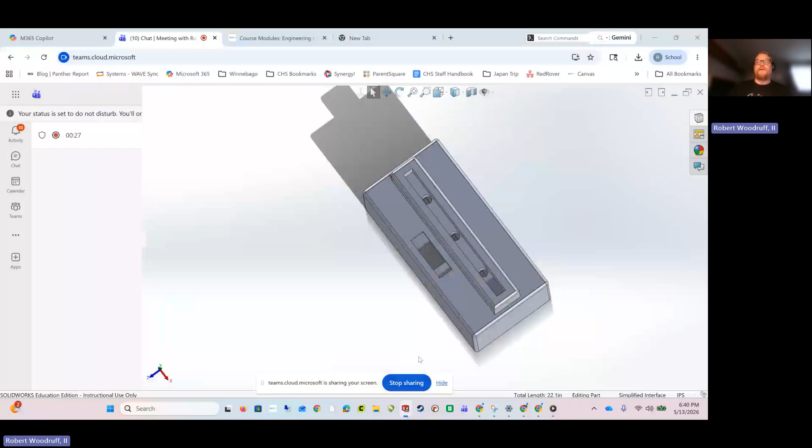All right, hello, this is Mr. Woodruff. I'm here to show you how to make the slider for the bottom of the light box. It's going to slide into this light box and hold your battery.

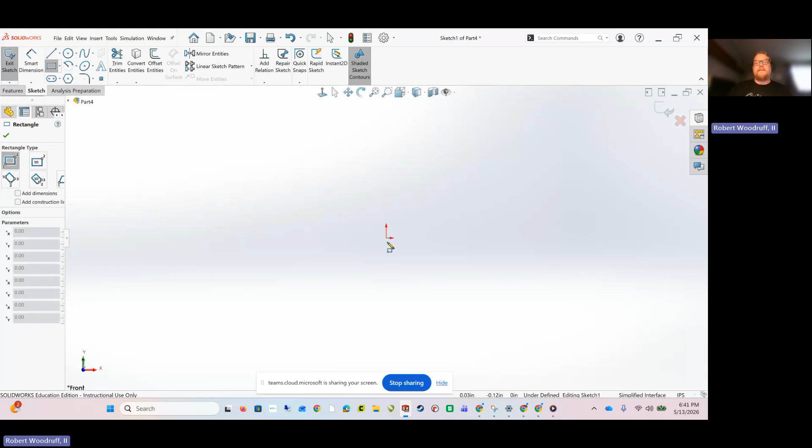So let's go to new part. I'm going to go to the sketch tab. Remember, if you don't have the sketch tab up here on the white bar, right click, go to tabs and click on the sketch and features tab. I'm going to use a corner rectangle, start at the origin, and just make a rectangle, long and thin like this.

Okay, smart dimension. I'm going to make this top horizontal 1.385 of an inch, and I'm going to make this vertical 2.850. I can see that I'm only showing 2 decimal points.

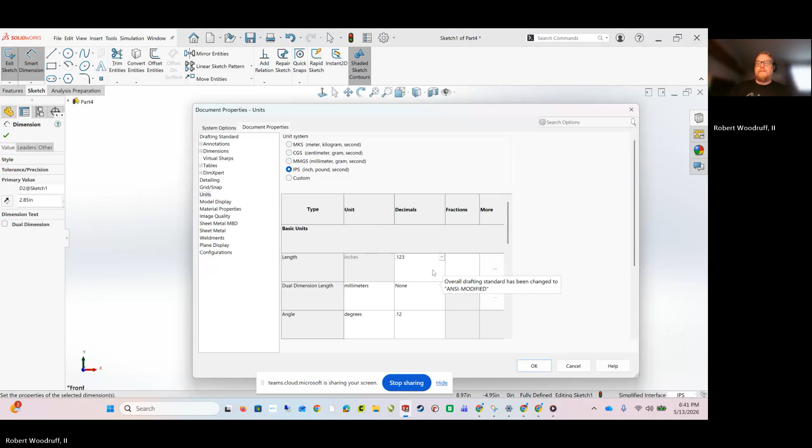I'm going to come down here to this IPS button, click Edit Document Units, go to length, and change the 0.12 to 0.123. And I'm going to click OK.

Now I have to re-enter the sketch. So I click on sketch and then click on one of the lines of my sketch, and now you should be able to see those numbers a little bit better. So, 1.385 by 2.850. And now I'm going to extrude this.

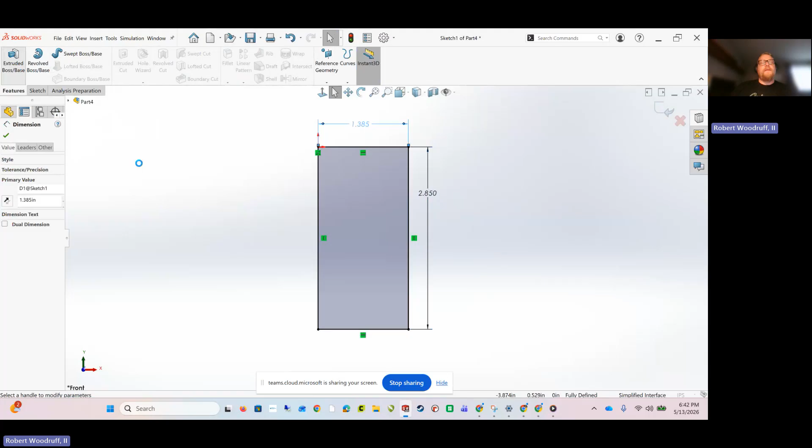So I'm going to click Features, Extruded Boss Base, and I'm going to extrude this blind at a depth of 0.095 of an inch, and then click the green check mark.

Okay, so now I've got this tab. Next, this is going to be the outside, the wider part of the slider. Now I need to make the thinner part of the slider.

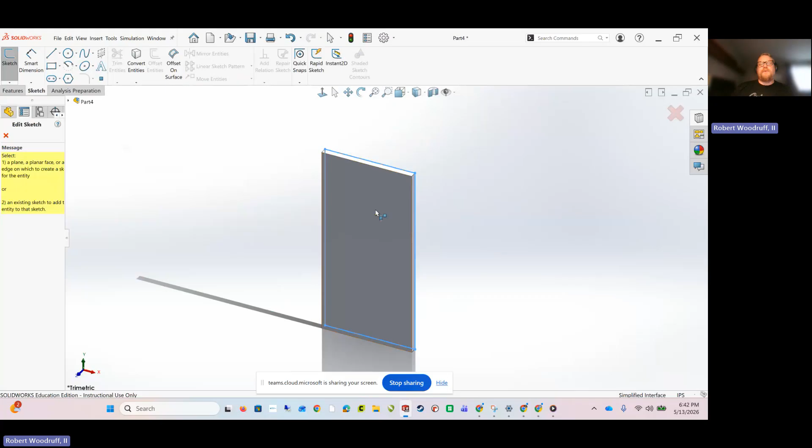So I'm going to go to Sketch, use another corner rectangle tool, try to keep this part simple. I'm going to click on the front face, start on the top edge of the part, click and draw down until I hit the bottom edge, like that. Okay, I'm going to smart dimension.

Oh wait, actually I'm going to do something first. I'm going to hit escape to get out of smart dimension, and just slide this off to the side. What I'm going to do is hover over this top horizontal line of the part I just made, right click, and click select midpoint. Then I'm going to hold control and come over here to this rectangle I just drew, and click on its midpoint while holding control.

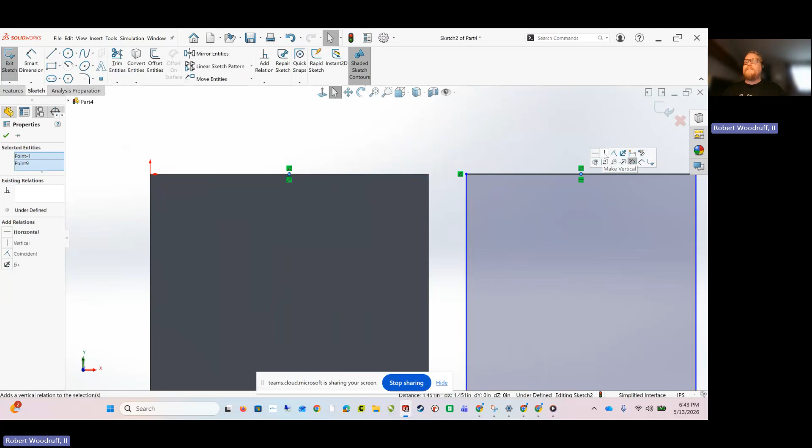Let go of control, and make those vertical. So I'm going to line up the centers of those rectangles. Now you can see that the new rectangle I made, for some reason, is bigger than the other rectangle I just made. So I'm going to grab a side here and make it smaller.

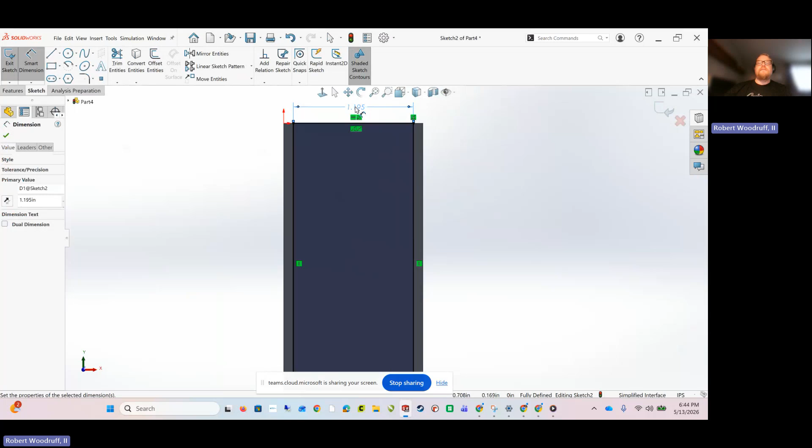Okay, I'm going to smart dimension the top of this rectangle that I just made at 1.195 of an inch. Then I'm going to extrude this, going to Features, Extruded Boss Base, doing a blind extrusion at 0.1 of an inch, and then clicking the green check mark.

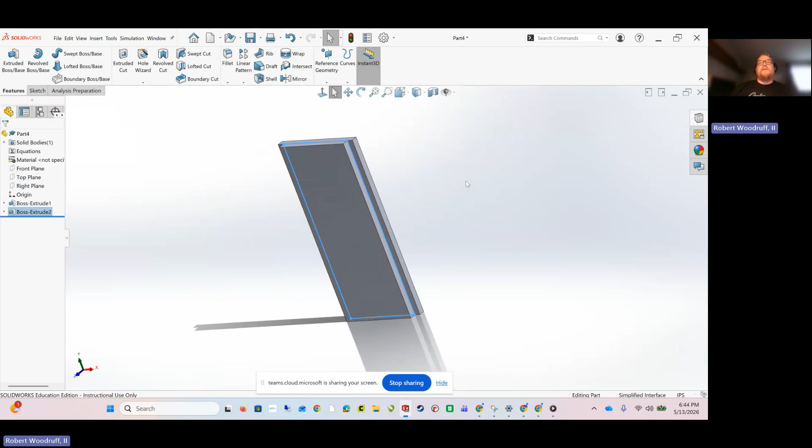Okay, so now I've got my slider. That works, you could literally use that as a slider if you like. What I would like to do though is create a little notch in here so you can put your thumb in there and actually use your thumbnail to slide this thing.

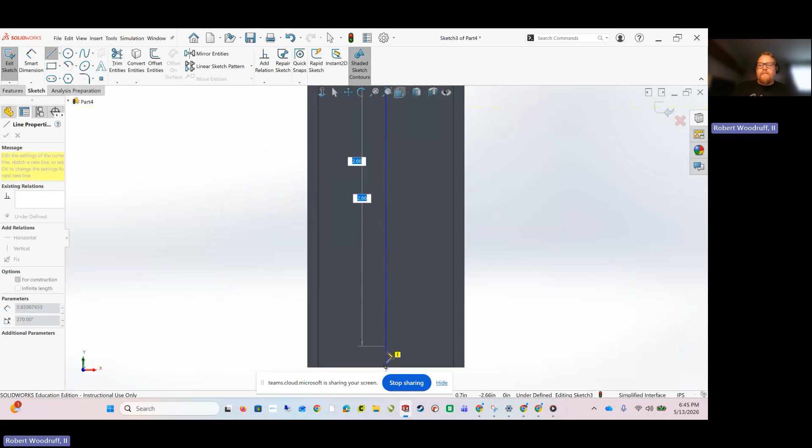So I'm going to go to the sketch tab, and I'm going to draw, let's do it this way, let's do a center line. I'm going to click on the top of this smaller rectangle, and go midpoint to midpoint, straight vertical line, midpoint to midpoint. Now I'm going to use a center rectangle tool, starting on that center line, just somewhere up here. Zoom in so you can see. I'm just going to draw a rectangle from that center line.

And I'm just going to smart dimension it. It really doesn't matter the size, just so I can get my thumbnail in there. I'm going to make this 1 inch, which is way bigger than it needs to be, by maybe 0.15 of an inch. I just need something to stick my thumb in.

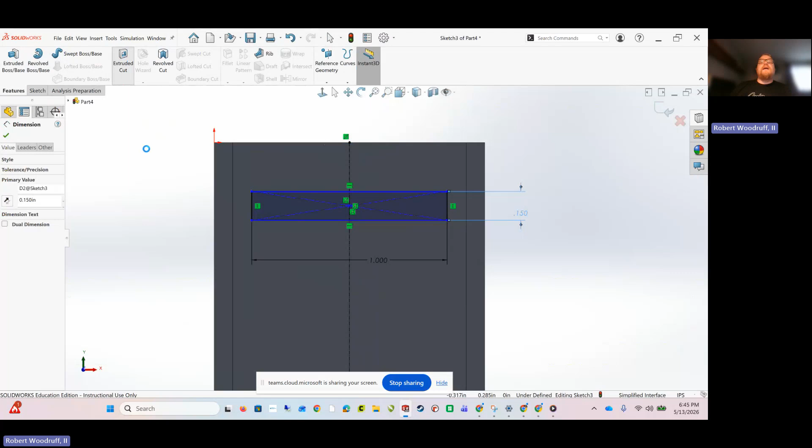Okay, and then I'm going to go Features, Extruded Cut, and we're going to just barely cut through this. So we're going to go blind, maybe a depth of 0.05 of an inch, and then the green check mark. Okay, now that puts just a little notch in there, so now I can at least have something that I can put my thumb on and slide this.